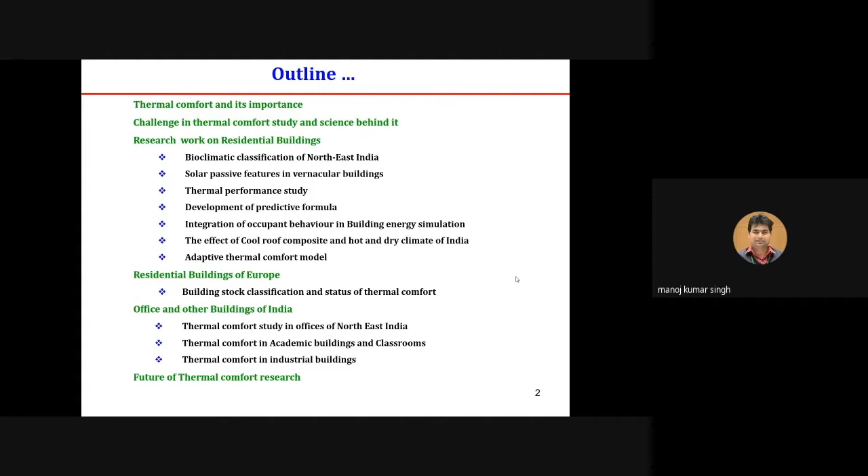So let's start with thermal comfort. Why is it important? Because we spend about 95% of our lifetime in the built environment and just 5% outside. The more we spend time inside the built environment - it may be houses, offices, inside buses or cars, or recreational centers like shopping malls, cinema halls - all different kinds of built environment together constitute about 95% of our lifetime. So it's quite huge. If we spend so much time in such environments, it becomes very important that we must feel thermally comfortable.

And whatever thermal comfort we achieve there, it may be substantial, and we must be accepting towards it. And the cost of achieving thermal comfort is very high, because generally in today's perspective, we use air conditioners.

Simply we use air conditioners, and we know, as students of energy, what is the energy cost of running an air conditioner. It's also very important because it affects our well-being, our health, our learning ability, our productivity, and above all, it is related to CO2 emissions, as we know. It is also indirectly related to global warming.

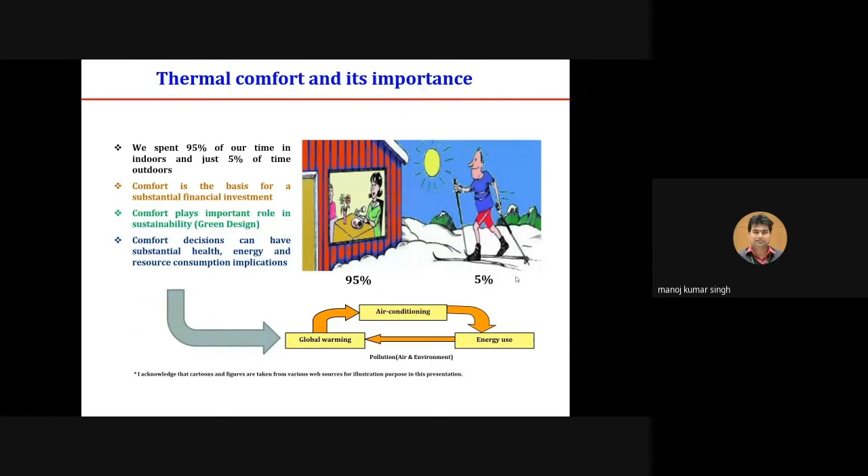So what are the challenges? The challenge associated with thermal comfort lies in the definition itself. There is a definition by ASHRAE that thermal comfort is the condition of mind that expresses satisfaction with the thermal environment. So it's just a state of mind.

It defines it, and on the other hand it also says that people or occupants staying in the built environment are just passive to this thermal comfort - they don't react, whatever we provide, they accept it. But this was not an accurate definition.

Then there was a modification done to this definition in the start of the 90s, and pioneering work was done by Professor Richard de Dear, Professor Nicol, Gail Brager, and many other scientists. They did path-breaking work where they said that actually people are active in the thermal environment, and when they feel discomfort, they react in a way which tends to restore their comfort. This is a more agreeable definition, as we experience also - whenever we feel discomfort in the built environment, we always act, and we act in a way that restores our comfort.

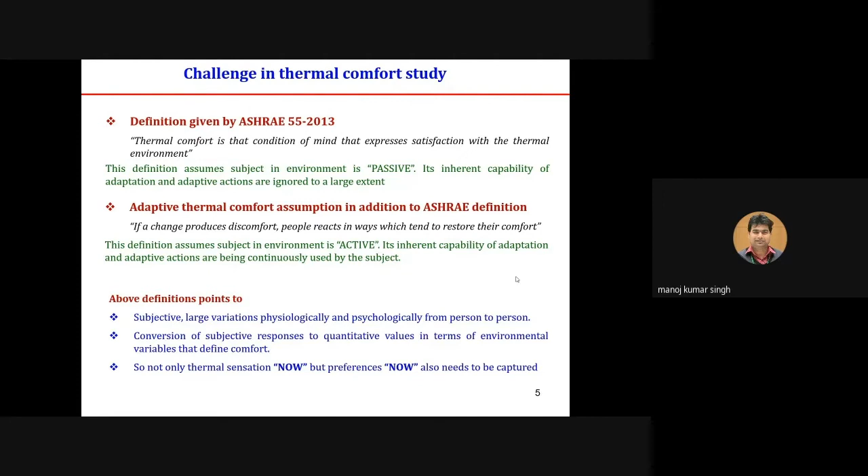In thermal comfort research, there are 4 environmental parameters and 2 personal parameters. The 4 environmental parameters are air temperature, relative humidity, and air speed. This air speed is not the actual air speed, but the speed across our exposed skin. And then radiant conditions, where we consider mean radiant temperature for the calculation. These are environmental factors because as design engineers, we have to control these things.

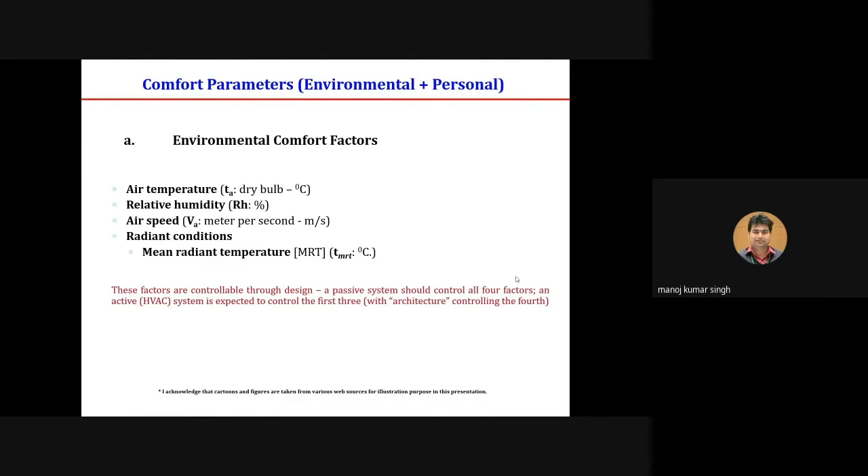The personal factors are clothing and activity level. These are actually person dependent. Each person, based on their choice, wears clothing, and based on his need, does different activities that relate directly to metabolic rate. And metabolic rate is directly related to heat produced from the body. So these personal factors vary from person to person.

Also the mental state of the subject matters. If the person is very anxious or very excited, then definitely his metabolic rate will be higher, and that also affects his response to the thermal environment. So that we also have to take care of.

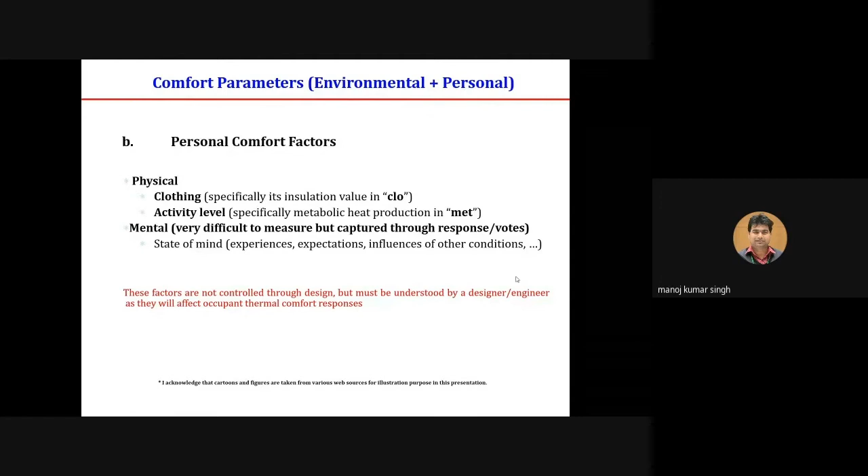As a design engineer for built environment, a person working as a consultant or as an expert of this subject should have a very good understanding of this. This is a designer's and engineer's job: he has to understand the physical basis of thermal comfort and related variables, appreciate the influence of psychological aspects of thermal comfort, and use this understanding and appreciation to design spaces that building users will decide are thermally comfortable.

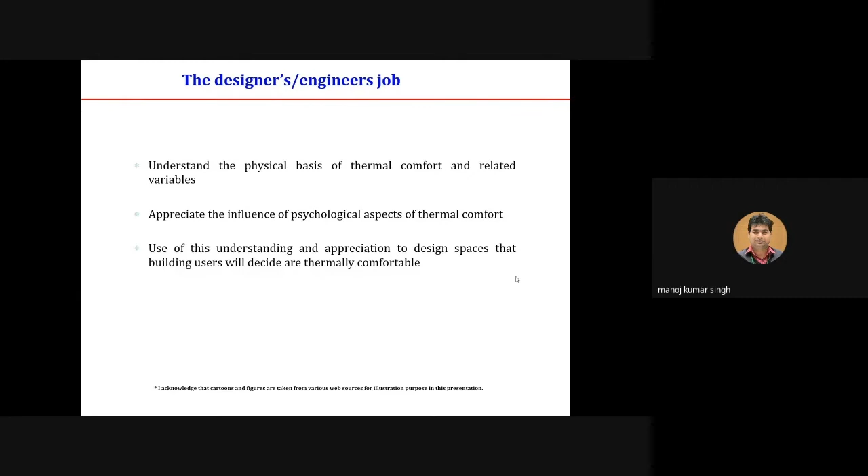These are some of the instruments that we use. These are portable instruments that we can carry. Since this is a subject where we need to interact with occupants who may be in different types of built environments, if the instruments are very bulky, it's very difficult to carry. So generally we use portable and very sensitive instruments. We carry them and interact with the occupants, and while interacting, we record physical parameters like temperature, globe temperature, air velocity, humidity, and surface temperatures, and so on.

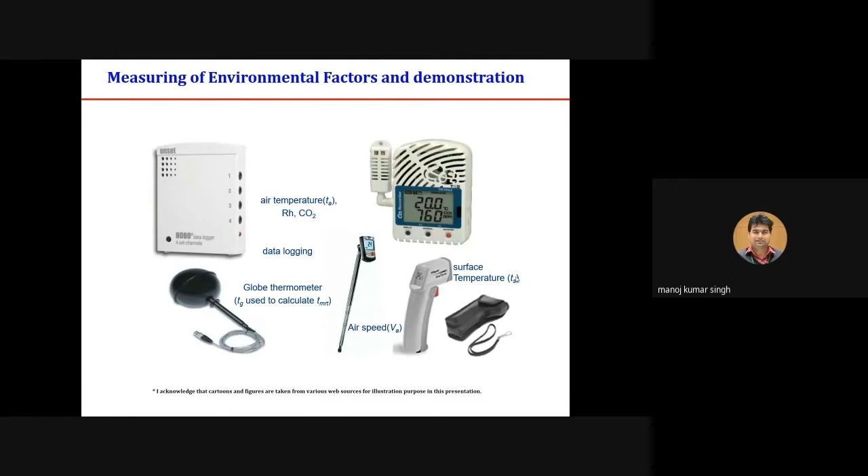When we put all these instruments on one stand, we also call it a weather station. Generally we keep this close to the occupants with whom we are interacting and collecting data.

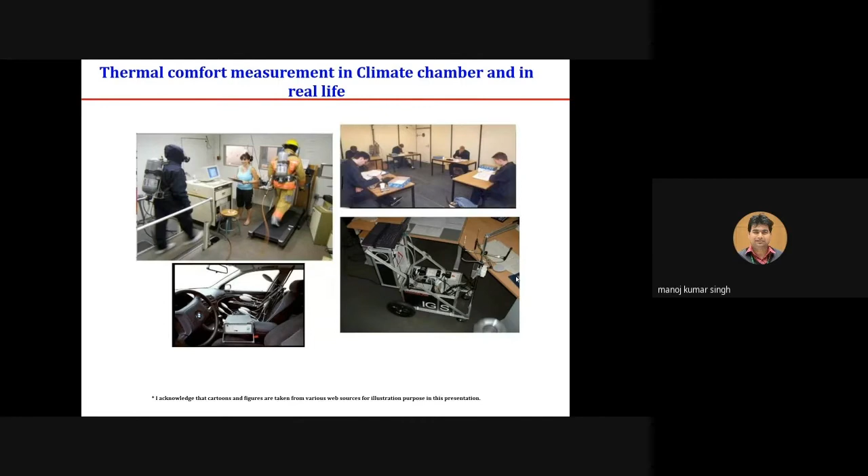These are different kinds of experimental setups where we record the responses of occupants. The top left figure is of a climate chamber, where the external environment is controlled, and people are engaged in different types of activity while we record their responses. Next is a classroom setup, where experiments are also done. We also do some experiments in cars. And in the bottom right hand side, you see all the instruments on a trolley, which we carry to the occupants with whom we are interacting.

There is also a preference scale on a similar 7-point thermal preference scale. So we record those votes also, and then we analyze them.

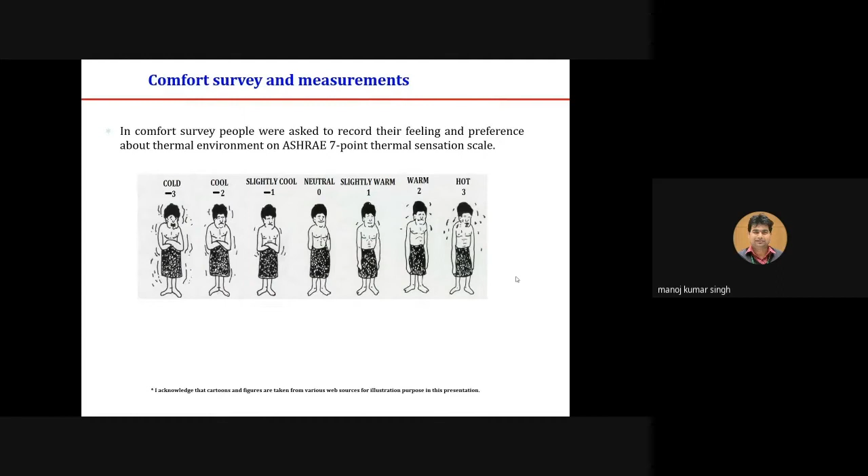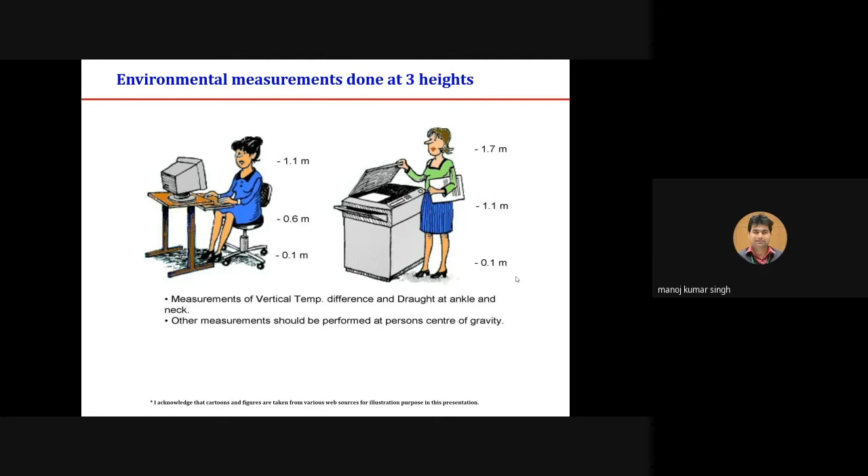It depends upon where you are doing the experiment. If you are doing the experiment in European countries, generally the height of people is more, so the range is about 1.7 meter. If we are doing it in Asian countries, the height of people is generally less, so it's about 1.5 to 1.6 meters.

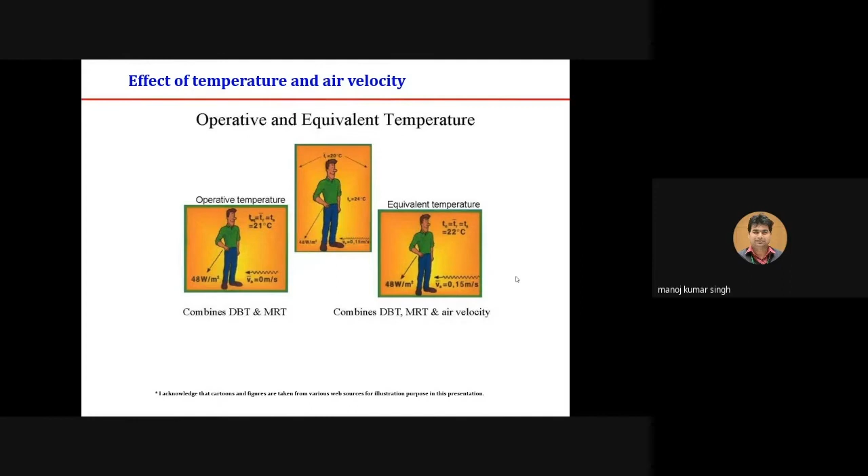So these are the effects of temperature. Operative temperature combines dry bulb temperature and mean radiant temperature. But if we consider the equivalent temperature, it also, in addition to dry bulb temperature and mean radiant temperature, considers air velocity. So air velocity has a profound effect on thermal sensation. If there is no wind, at the same dry bulb temperature and mean radiant temperature, a person may feel comfortable, but as the wind starts, he may feel cold.

So this is generally the difference between operative and equivalent temperature, and these are the actually derived thermal indices. So we combine two or three parameters to get this, so they are called derived temperature units.

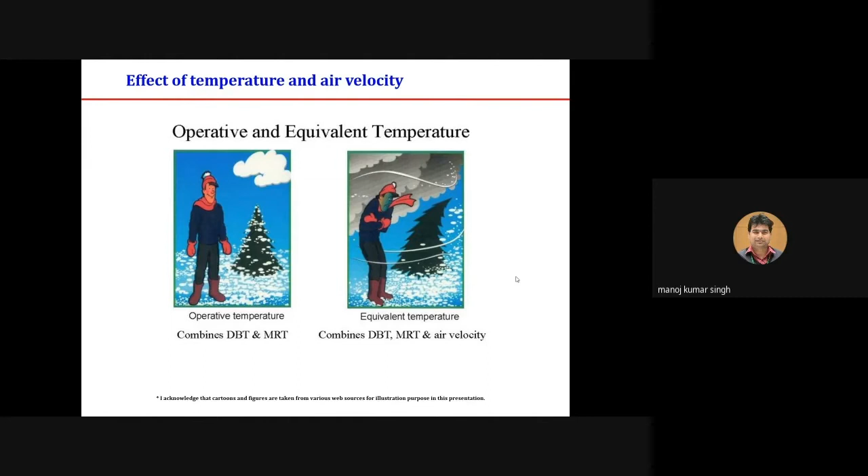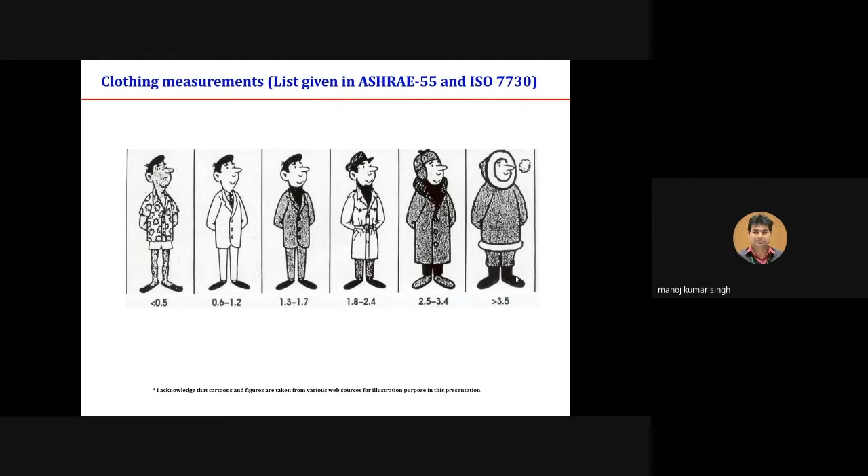So the science behind this comfort is generally the balance between heat produced and heat lost. If the amount of heat produced is equal to the heat lost, then we say it's neutral. The body is not gaining or storing heat. What is produced is what is lost, so the body remains constant, and that is where we feel comfortable. Whenever there is some kind of storage taking place, or there is more loss compared to what you are producing, or the loss is more rapid, then we feel cold.

This is the equation that we deal with in thermal comfort, the heat balance equation. S is the rate of heat storage of the human body, M stands for metabolic rate, W stands for the mechanical work done, that is met, E is the rate of total evaporation loss, and R plus C is dry heat exchange through radiation and convection. I'm not going into detail, but this is the general concept.

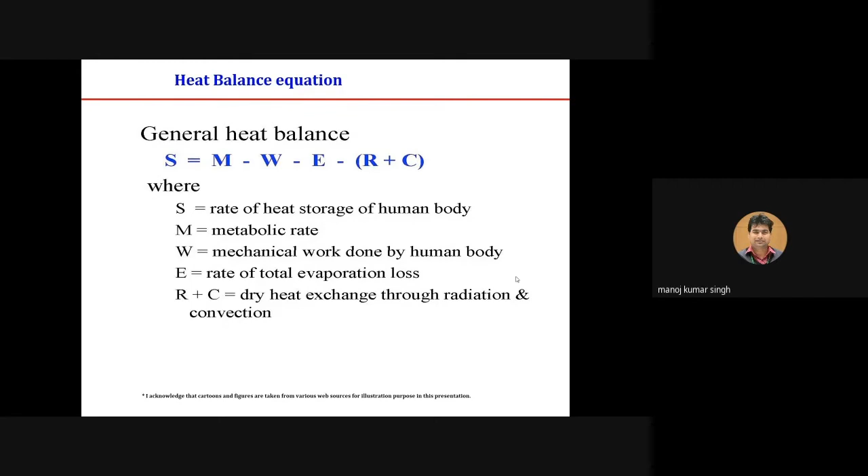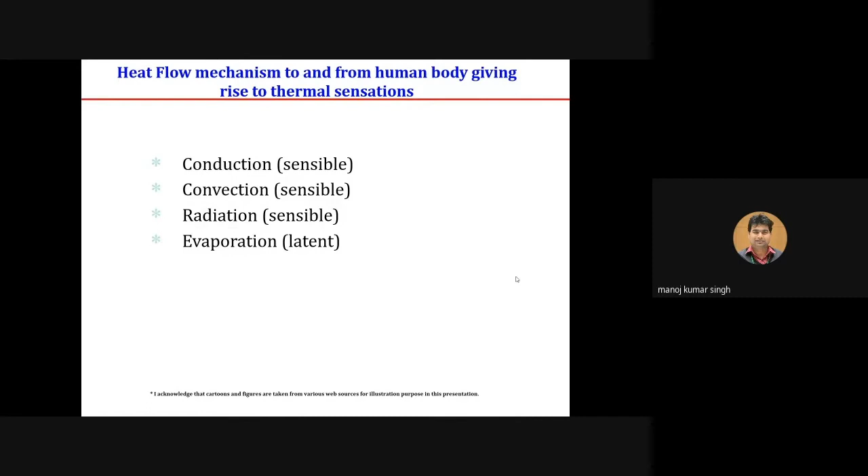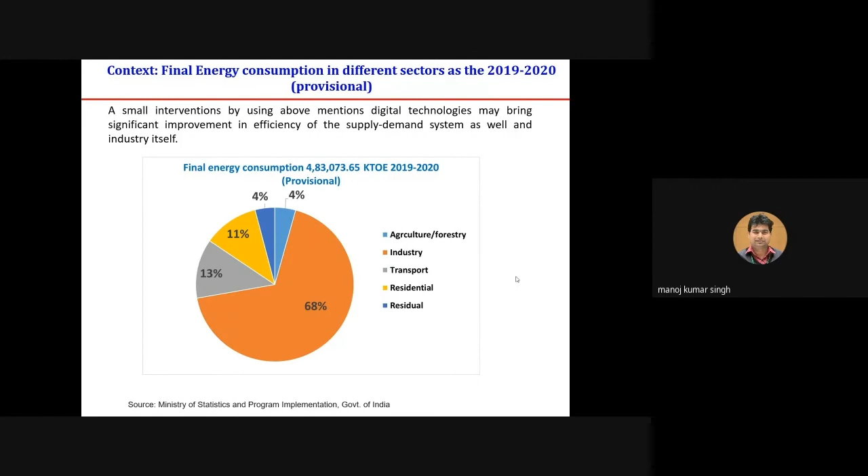So what is the context actually? Why do we do this research? Because it is indirectly related to energy. You see this Indian basket of final energy consumption, 2019-20, these figures are provisional. Industry consumes around 68% of total energy, and residential consumes about 11%. If you see the next slide, it's much more worrying, because in the residential sector, 60% of this energy consumption goes to air conditioning. This tells us that we have to think about it and construct our houses more responsibly so we can minimize energy consumption and enhance comfort.

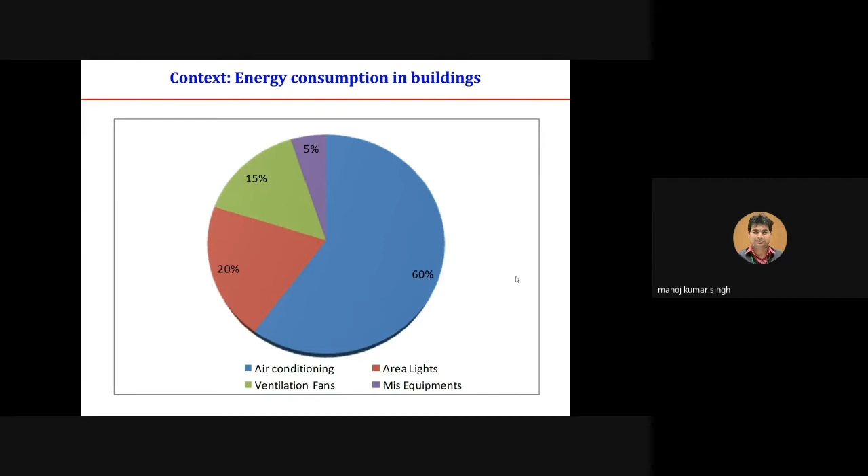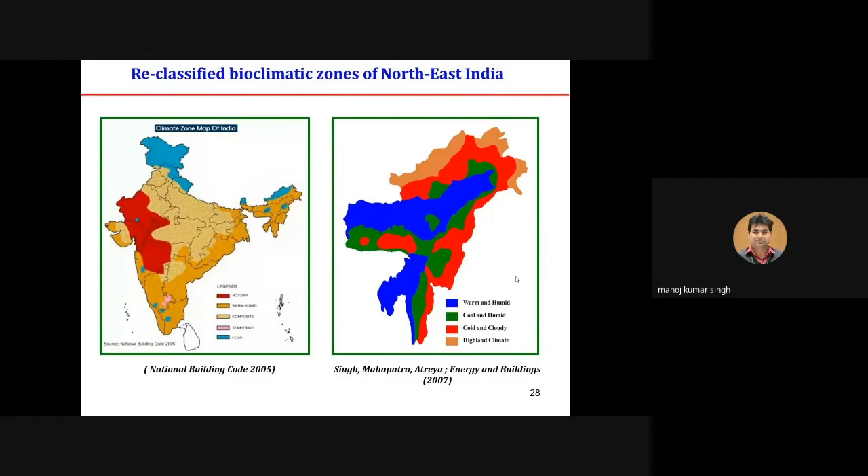So we collected data from stations throughout Northeast India, information about temperature profile, humidity profile, precipitation profile, and altitude, and then analyzed this data. These are about 30 years of average data, and finally we classified Northeast India into mainly three bioclimatic zones: warm and humid, cool and humid, and cold and cloudy. The right hand side figure represents the new bioclimatic zoning, with specific ranges for summer and winter temperatures, humidity, rainfall, sky condition, wind direction, and vegetation. This provides more detailed information that can be used by architects in designing buildings, and also by researchers working in this area.

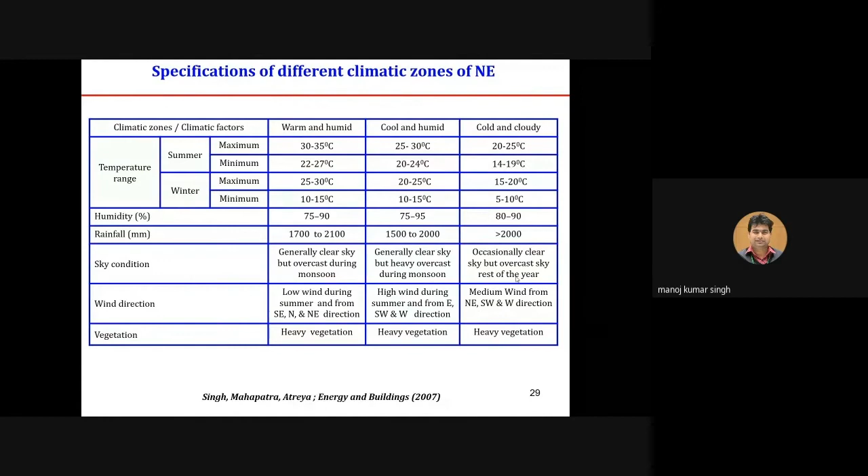We also have to estimate the bioclimatic potential. That means the climatic features that we can use in the building to enhance comfort and lower the energy consumption needed to attain comfort.

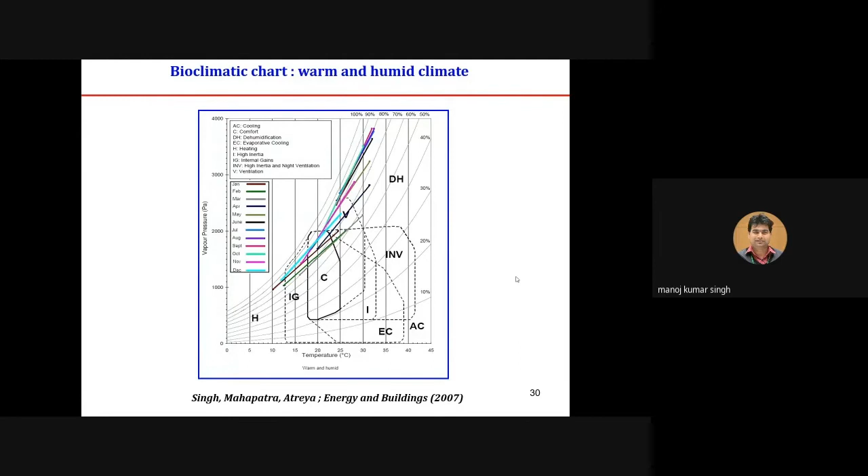We also see the comfort duration, where we don't need either cooling or heating, so naturally we are comfortable. The temperature lies between the comfortable range. Same applies for heating.

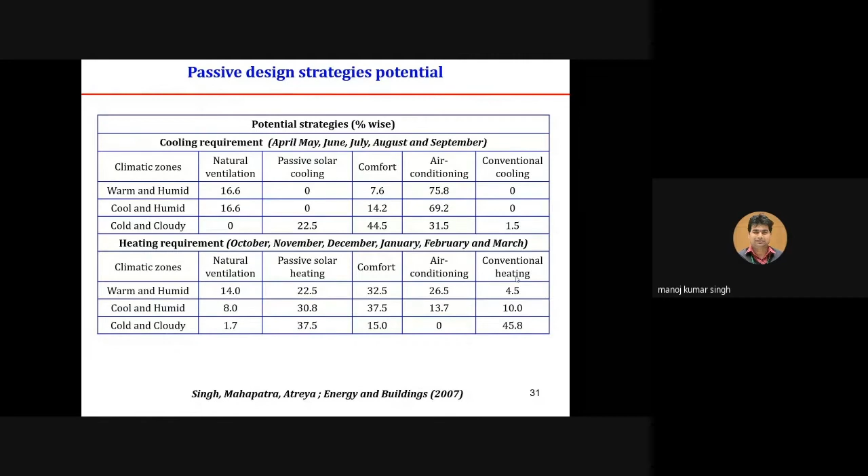We also studied the existing features in traditional architecture, and found a lot of bioclimatic features related to ventilation. These enhance natural air circulation inside the building, as there are many openings provided, and these openings are aligned according to the wind direction.

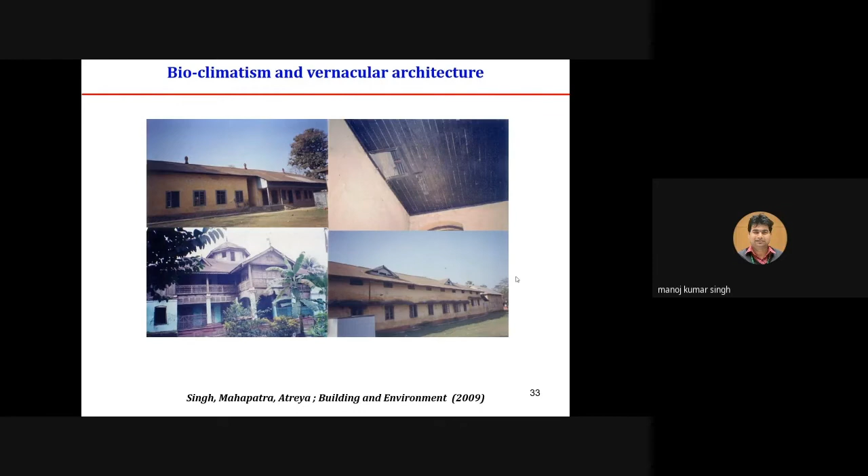Also, to minimize heat gain, the structures are made of wooden structures on the top floor, with a lot of wood used. These are some of the solar passive features about ventilation techniques we documented.

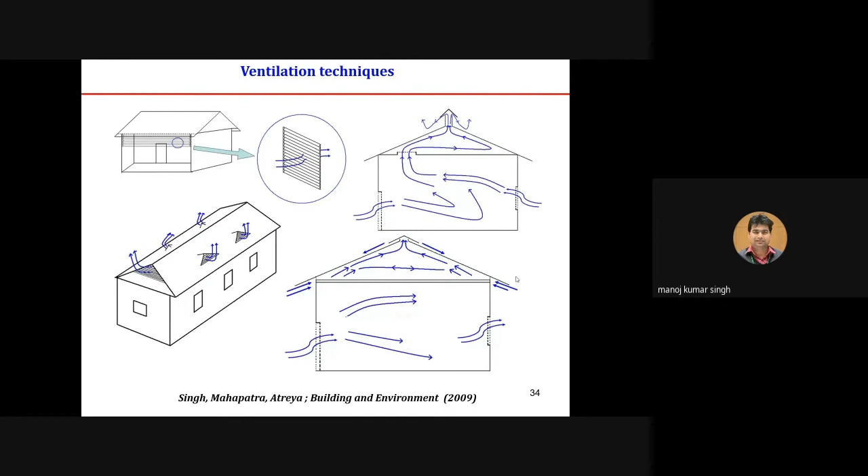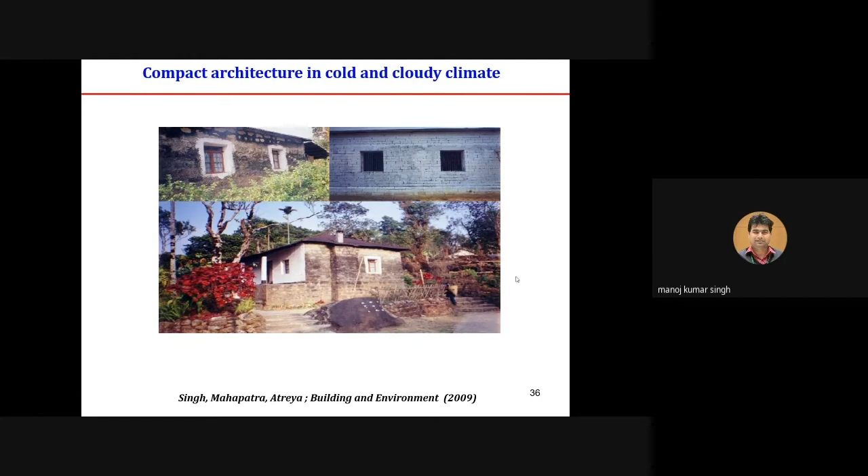Next is thermal comfort and thermal performance study. We carried out a survey in around 150 houses, 50 houses in each climatic zone, and interacted with about two occupants in each house. This study was done throughout the year, and then we evaluated the data.

We also selected 3 houses in each climatic zone and monitored them for almost 1 month in each season—4 seasons in a year, starting with winter, spring, summer, and autumn—and carried out the thermal performance study.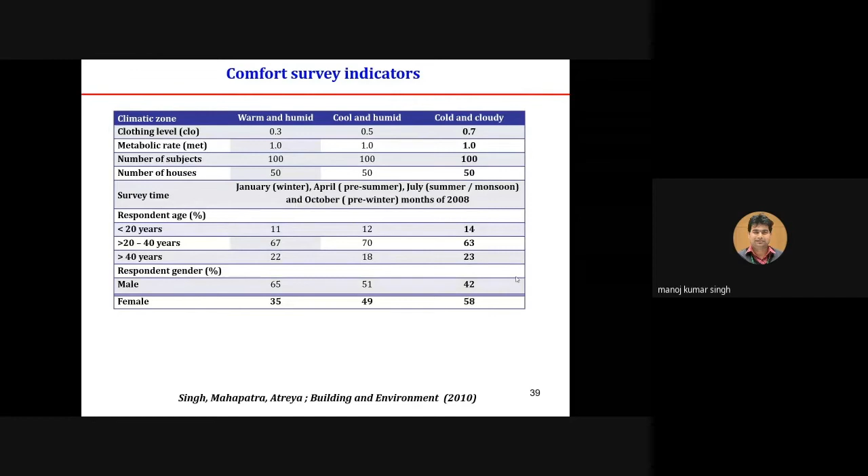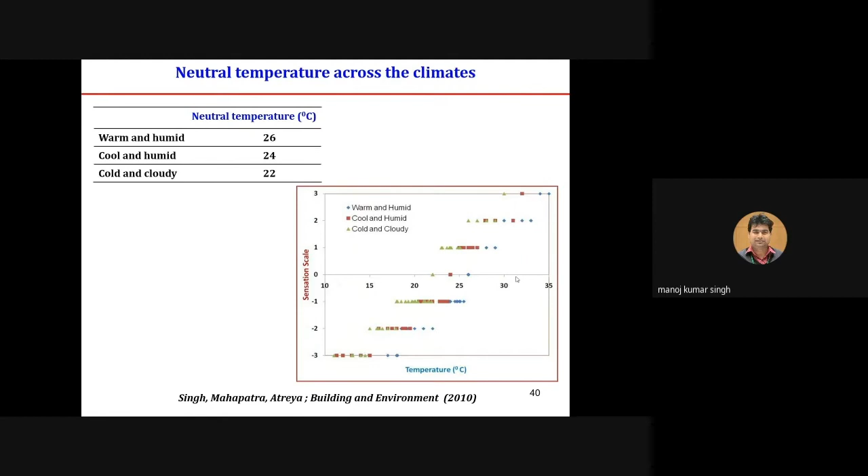This is about the comfort range we found after analyzing the data, for warm and humid climate, that is Tezpur. Tezpur is the study location, lying in warm and humid climate. We found that the comfort range starts from 22.8 and goes up to 29.1.

So this is about almost close to 7 degrees Celsius. Now with this range, if we provide this information to the architect or building designer, he can design the building in response to the climate.

The same applies for Imphal and Cherapunji, and in all the places we got the comfort range throughout the year—close to around 7 to 8 degrees Celsius. It was quite interesting information, and when we communicated it, it got published in Building and Environment. From there onwards, people started talking about the range of comfort temperature.

It's always not possible to monitor or visit all the houses in a particular region, because there is a time constraint, resource constraint, and also accessibility issue. So it's always beneficial if we do some kind of mathematical modeling.

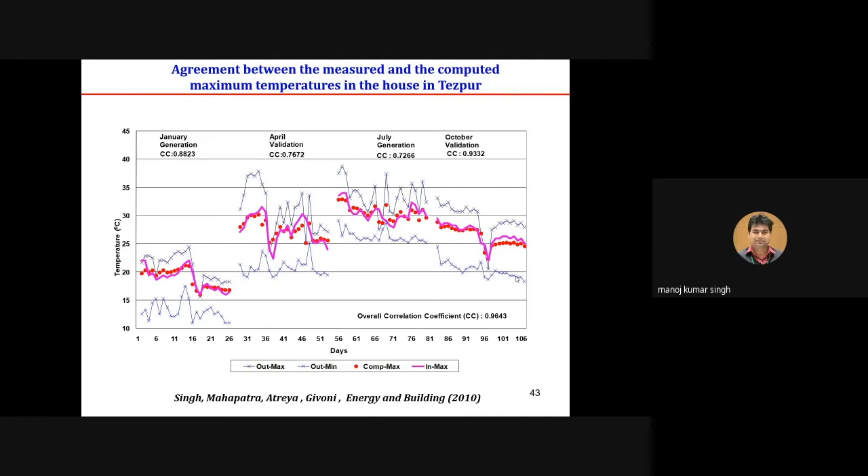Again, it's not possible for us to do experiments in different conditions. We cannot sometimes create some conditions during the experiments. So it's always better to do the simulations.

The most efficient simulation tool in this area of research is TRNSYS. There are other tools also, like Design Builder, Energy Plus, Virtual Environment. There are a lot of tools, but TRNSYS has got some special capability because it's a very modular program. So whatever you want to do, you can do. There is as such no boundary, and it's very versatile.

So this tool is used very widely in building energy simulation. So we also studied, and we tried to integrate the occupant behavior.

Occupant behavior has a profound effect on energy consumption in the building, because if the person is uncomfortable, he will take all the actions, and these actions are all focused on restoring the comfort. Also, each occupant has different behavior.

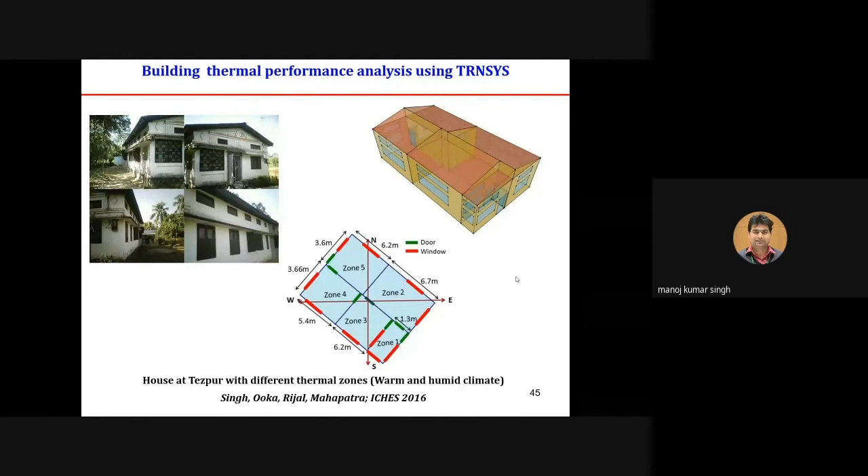So this is the house where we modeled in TRNSYS, and we tried to integrate the occupant behavior there. This occupant behavior is related to the opening and closing of windows. So we have control strategy 1 and control strategy 2. Control strategy 1 is the strategy that we got after analyzing the thermal comfort data, and control strategy 2...

We devised control strategy 2 just to check how effective the control strategies are. So we created our own strategy 2, and we compared the results.

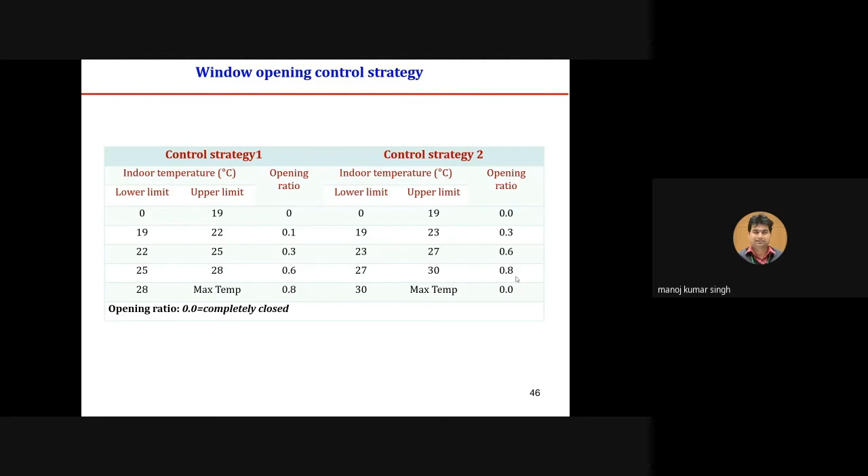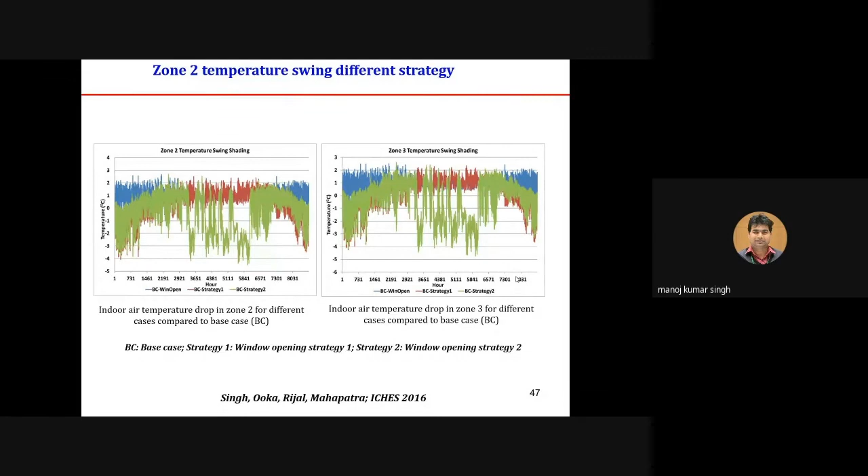But because of control strategy 2, it deteriorates in summer, and same in winter also. So from here we concluded that the occupants of the houses are operating the windows quite wisely. So when we design automation of window opening and closing, we must do some kind of surveys in the houses so that we can devise the exact control strategy.

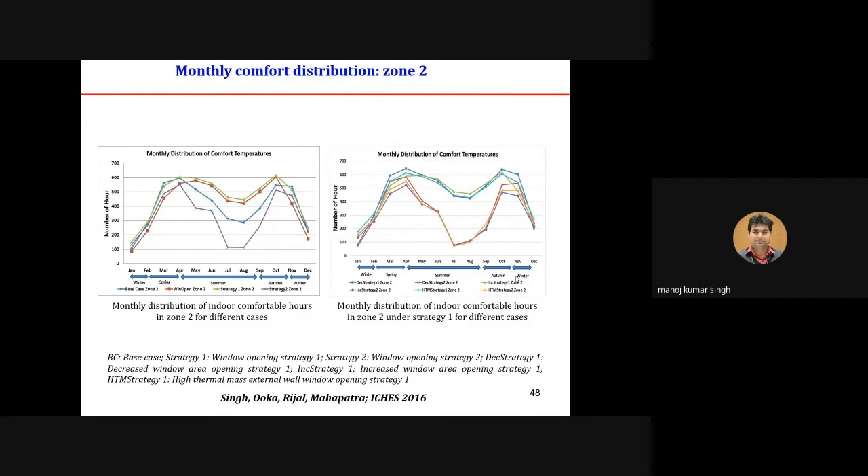And also we know the effect of cool roof. Cool roof is a passive technique where we do reflective coating on the exposed part of the roof, and then we analyze the effect of it on the indoor temperature. These days you should be hearing a lot about reflective coatings, cool roof techniques.

These are nothing but reflective coating - a white paint, generally white in color. It has a high reflection coefficient, and it reflects most of the solar radiation. So it blocks the heat that transfers to the indoors. We analyzed that also.

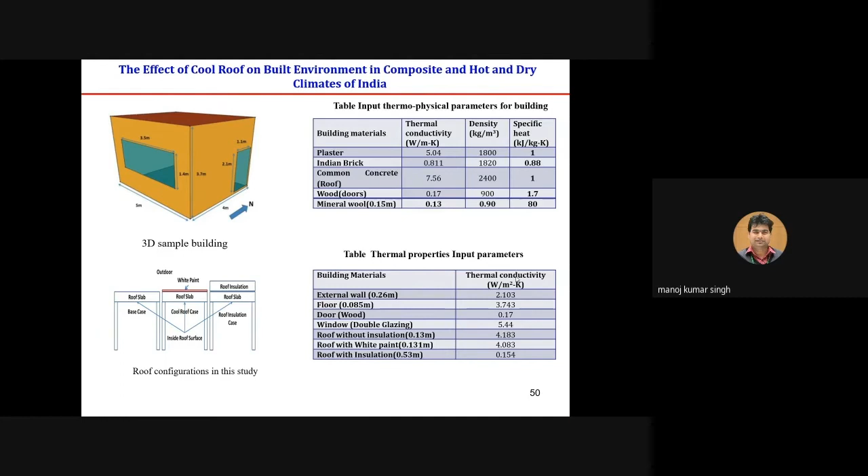For that, we considered a simple house, put all these parameters, and ran the simulation. The figure on the bottom left shows the construction, how we constructed it - we put the roof slab, and above that we apply the white paint, and then we run the simulation.

So here we find that when we apply the cool roof concept, there is a temperature decrease of around 4 to 5 degrees Celsius in summer months. And if we convert this in terms of heat energy and cooling load, it is huge. So 4 to 5 degree lowering of temperature inside the building is very significant. With this, we found that cool roof is quite effective.

So when you have seen this, the definition is about adaptive thermal comfort. There are always two approaches: one is the heat balance approach, and one is adaptive thermal comfort. As both definitions are different, generally people carry out experiments using the heat balance approach, and when it is applied to the field, there is a deviation.

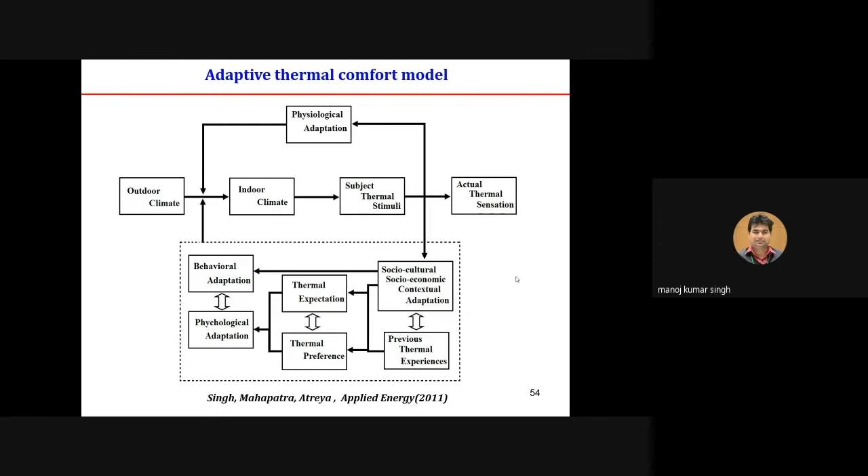So since that study should not get wasted, if we can add some kind of corrective term - in physics or engineering, when we do detailed experiments and find some kind of error or deviation, we calculate some kind of coefficient and add it to the actual formulation so that it defines the deviation we get in the experiment result. So the same approach is applied here, and we calculated the adaptive coefficient.

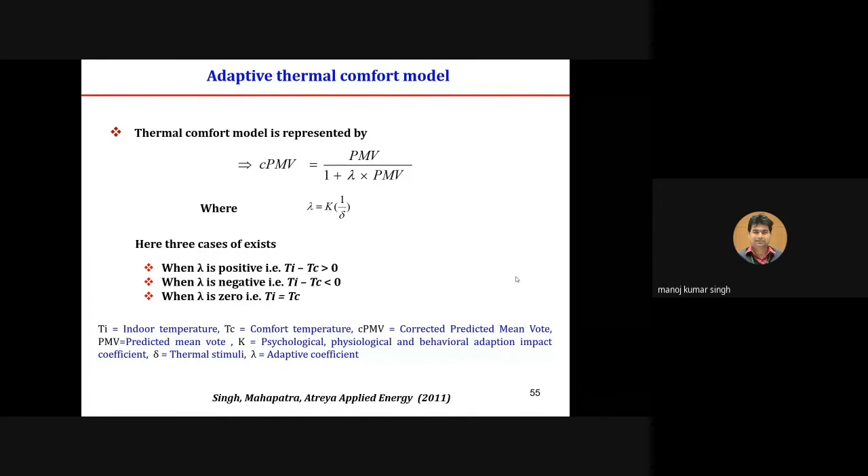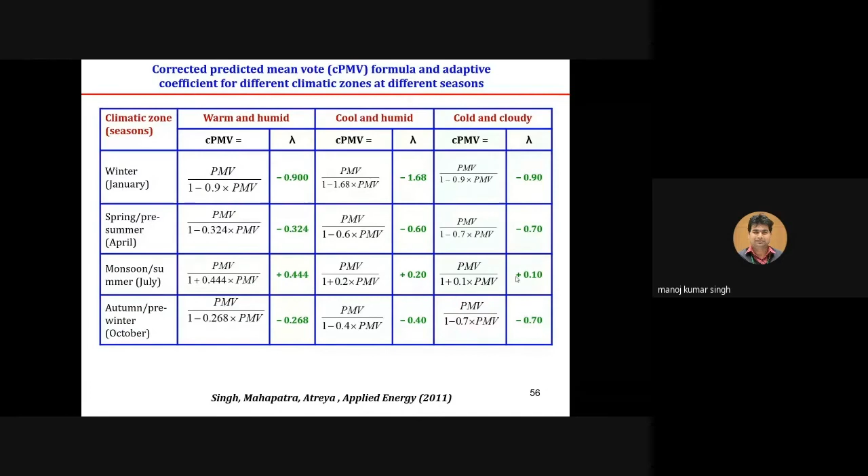So this is the formula of that. Lambda is the adaptive coefficient, and we calculated this coefficient. When these coefficients are added to the actual formulation of thermal comfort, the results become close to the field results. So this graph shows the same thing.

So we see on the left hand side, top figure, there is a deviation between AMV and PMV. PMV is the heat balance approach, and AMV is the adaptive approach. So when we applied the adaptive coefficient to this PMV, the results become very close to the actual experimental results. Same is for summer conditions.

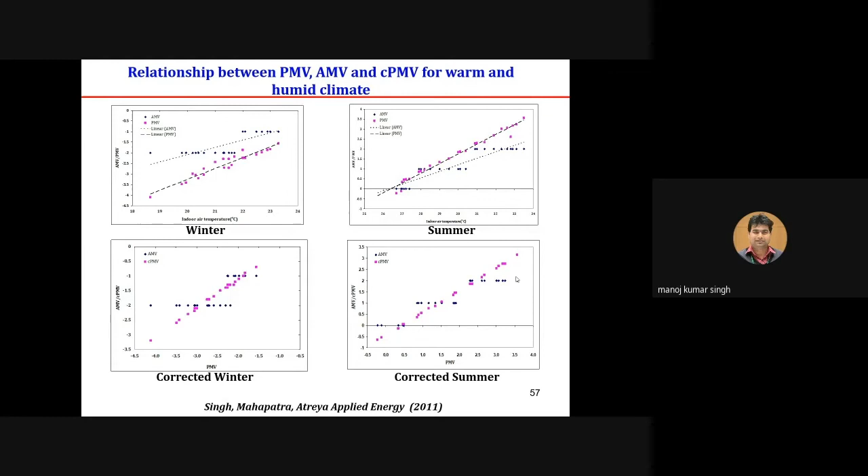So, as sir told, I also went to a European country, Belgium, where I was assigned to work on traditional residential buildings. These residential buildings are almost 70 years old, constructed after the First World War. I had to work on them and define what is the comfort status, and why people are not going for retrofitting, because the heating energy consumption was one of the highest in those buildings - even compared to European standards, they are almost double, 2 times that. And Liège city has almost 60% to 70% of the building stock that lies in that category.

Since these houses were constructed during that time, there are no modern equipment for heating, and nothing like insulation. So these houses are already designed very compact. Now if people go for refurbishment, meaning retrofitting, they lose a lot of indoor space, because insulation materials are anyway around 6 to 8 inches thick, and they have other losses, like furniture and everything. When they retrofit, it doesn't fit in the building, and these costs were not covered by government or bank. So there's a failure, and then I was assigned to do this work, and I completed it.

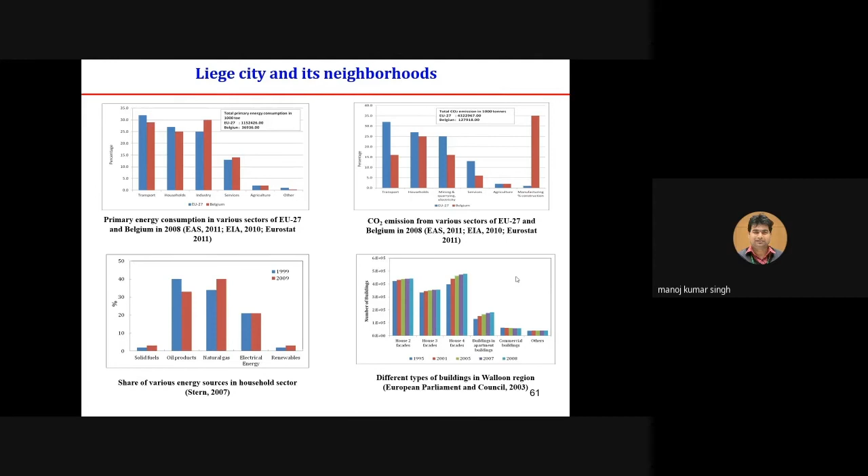So this is again the figure, and here is the age group of houses. These are the classification of the houses, and age group in different, about the different built-up area. And then composition of external walls of the houses that are constructed before 1945. And this is the distribution of buildings with shared facade, more than 35%.

So you see that at the center, where the space constraint is there, there are more number of houses. They have 2 facades exposed to the outside environment, that means there are more apartment buildings. This is about density of apartment buildings.

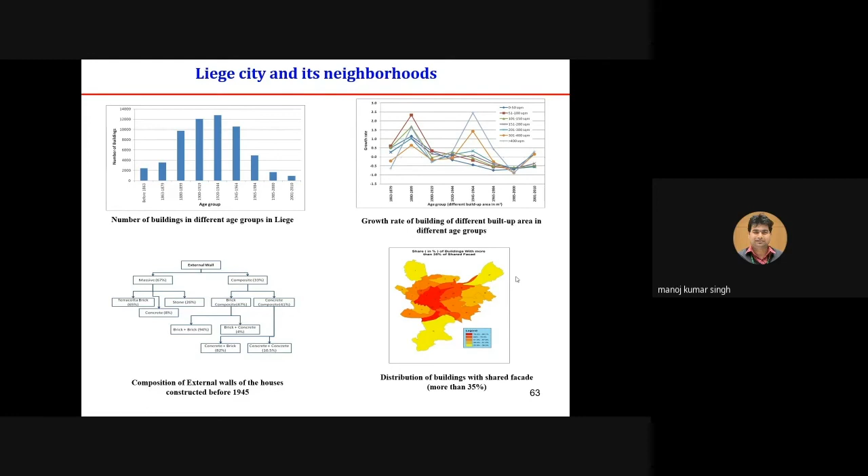And there also I monitor 2 houses, one in winter and one in spring, and see, this is the characteristics of the houses. So in winter, see, this temperature is quite fluctuating because in this house a thermostat is not installed, since it was a very old house. Its construction was close to 1918 or something.

So they control the heating manually, and they have a gas heating system. So they don't have radiators. They burn gas, and through that gas burning, they heat the indoor temperature.

So this house, this automatic thermostat was not installed, so they are controlling the heating equipment manually. You see there's a large fluctuation, and also in winter months they have an overheating problem, where temperature is going close to 30°C. This is one of the biggest problems in all European homes where some kind of retrofit is done, so even in winter months they have an overheating problem.

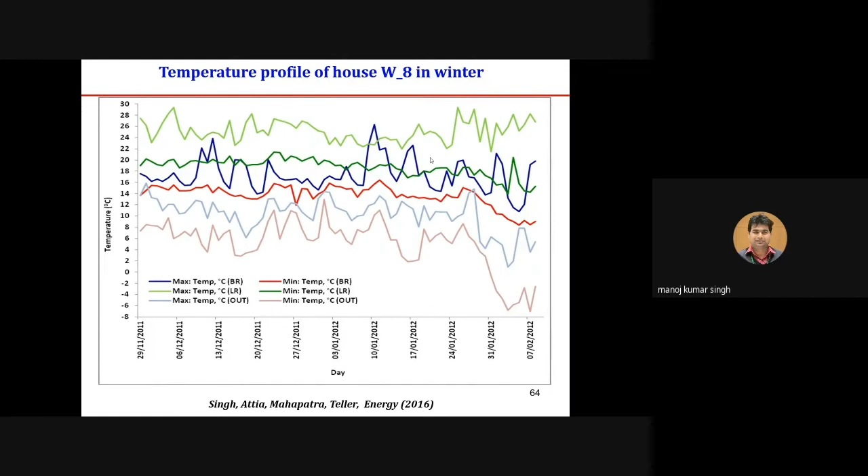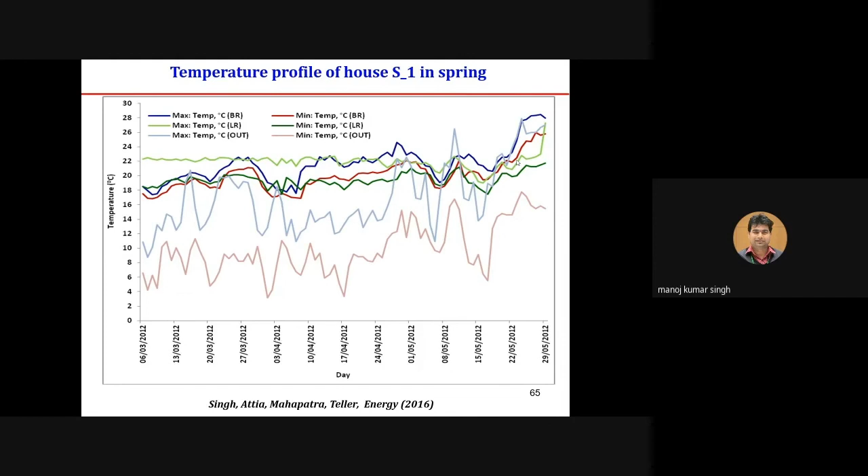This overheating problem in European houses is very high these days, because the government has enforced this retrofitting, so they have to go for insulation, and the houses are such that the top floor is the bedroom. In Europe, the sunlight starts at around 8 o'clock in the morning, and in the evening it goes up to 8:30 p.m. So almost the entire day this room is exposed to the sun, and then there is overheating. So these kinds of issues are cropping up, and they are working on cooling technology where the houses can be kept at comfortable temperature. This seems very strange, but yeah, this is the acute problem these days in all the European houses.

So this is the detail about the comfort duration in these houses. The pattern is quite distinct. So you see this, the temperature range and duration of various houses.

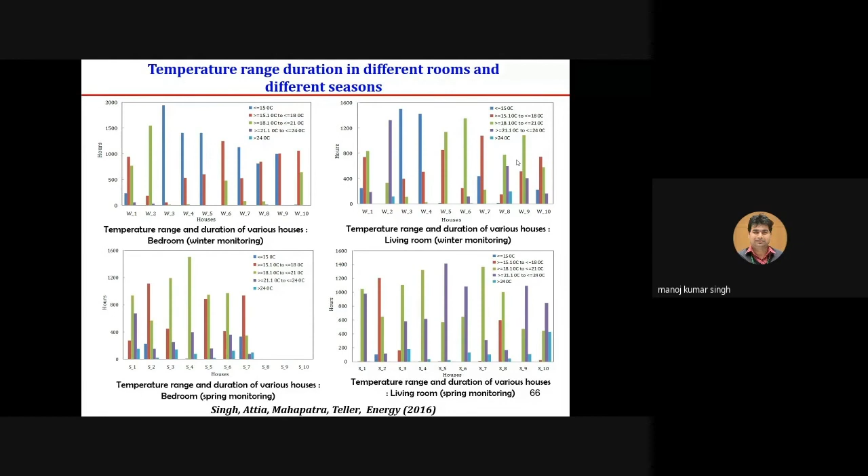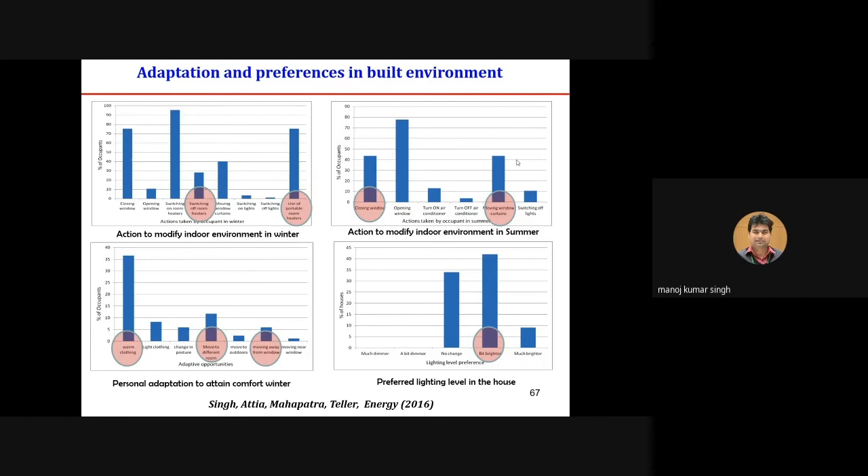So now, since I'm still working on this area of thermal comfort, I studied different types of built environment. Some cases I will discuss here, and here you will see some graphs, some plots that we commonly do in thermal comfort study. So this is about the offices.

I did this study on thermal comfort status in the offices of Northeast India. My study locations were Tezpur, Shillong, and Imphal. In the first leg of my studies, I considered Tezpur and Shillong, and I will show the analysis of this.

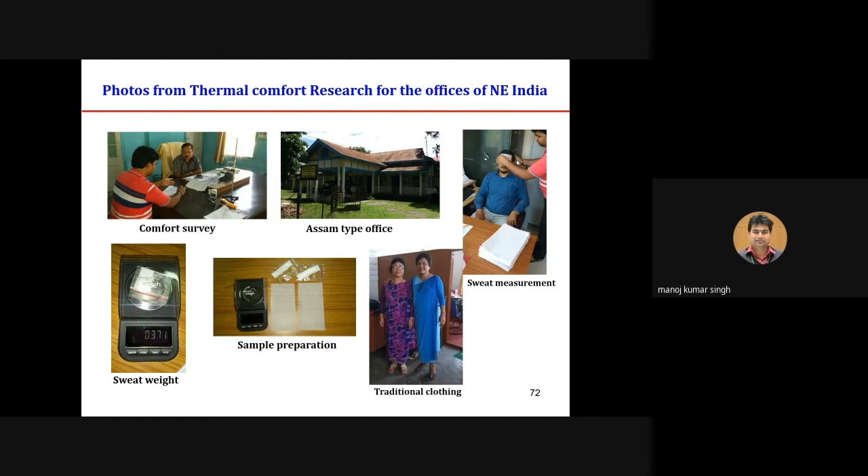This is the way we do surveys. We also record the data. We interact with the occupants one by one, take the environmental measurements, and then analyze it.

Though the neutral temperature is close to 24 degrees Celsius, people prefer to be higher than that - close to 26, 27 degrees Celsius - because that is their comfort temperature. So people tend to stay warmer.

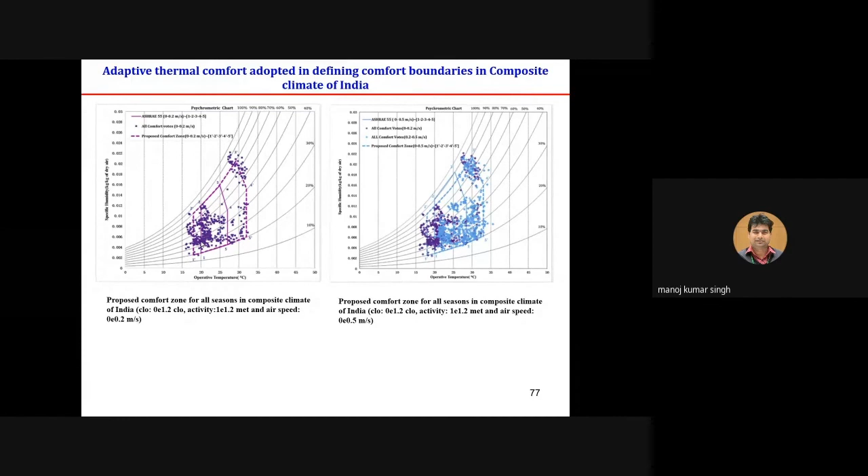So here we did this - this is the bioclimatic comfort chart for the composite climate of India. These boundaries you see on the right hand figure are defined based on the data we collected.

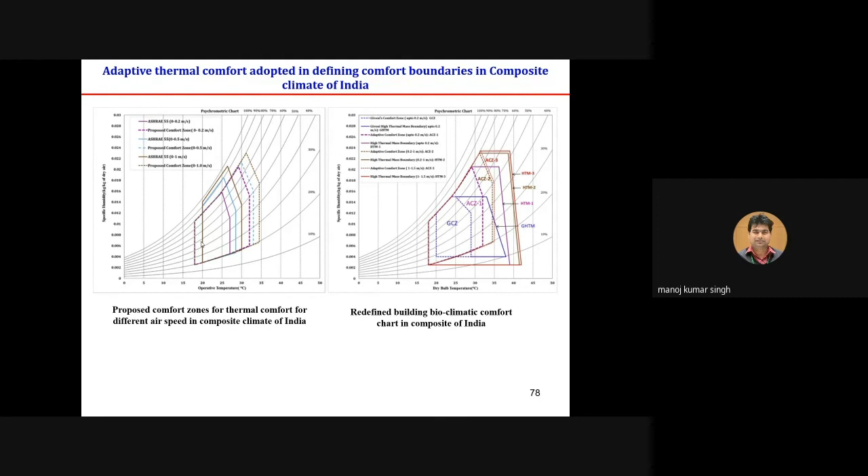This kind of chart is very important for architects and building designers, so we can use the solar passive features or bioclimatic features and integrate them into the building design.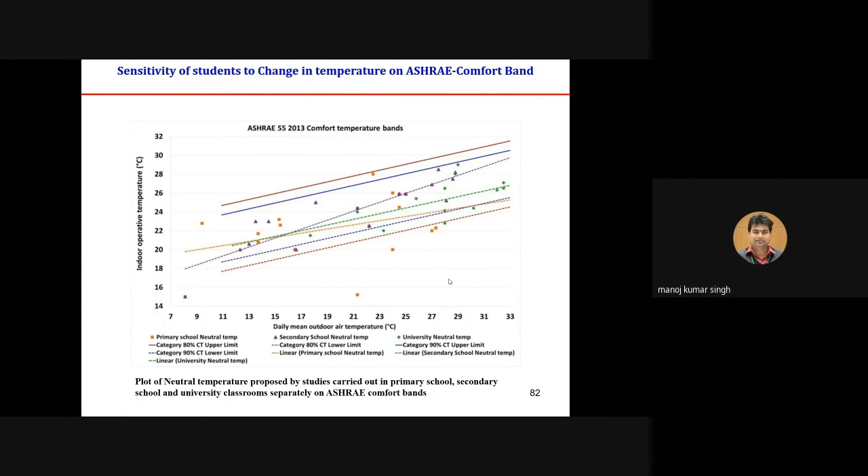This is about the higher and lower limit of comfort temperature. Asia has the higher range of comfort temperature because in Asia most schools and classrooms are still naturally ventilated.

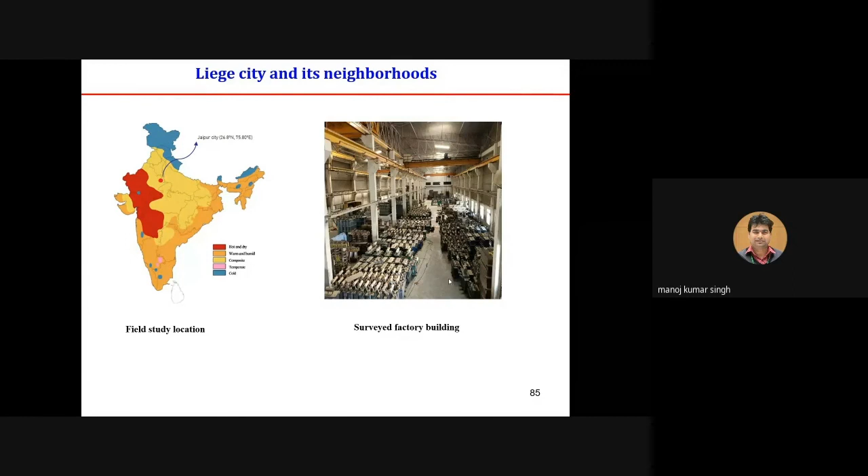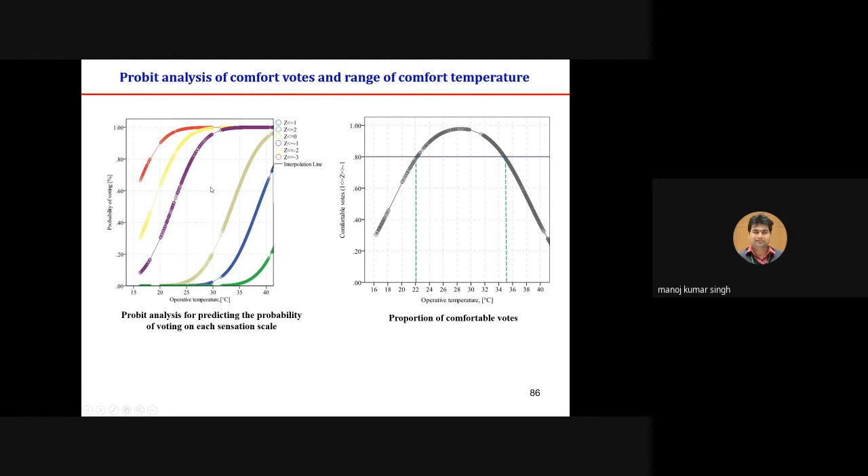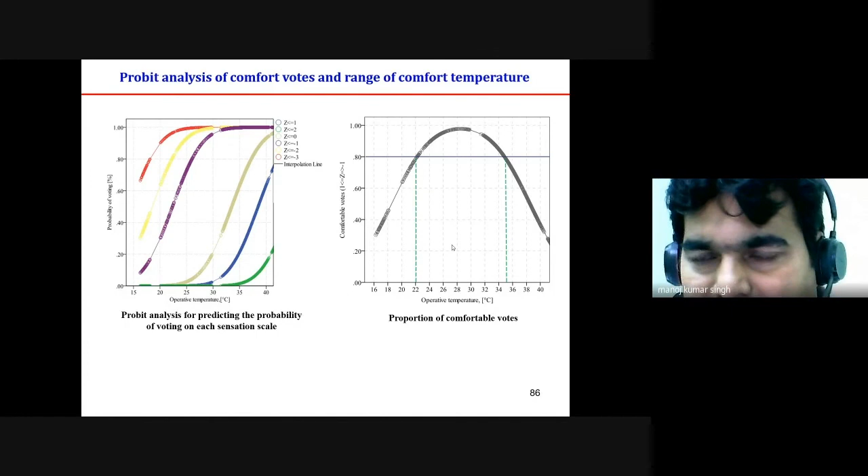The right hand side figure represents the same information in a different way. The two green lines and the temperature range between them show the range of comfort temperatures in the industrial setting.

This is a different type of analysis where we define the comfort range on the left, and on the right is the logistic regression analysis for predicting fan use behavior in the industrial setting. In the industrial setting, fans start operating well below 20 degrees Celsius, close to about 18, and when it reaches about 30 degrees Celsius, almost 80% of the fans are operating.

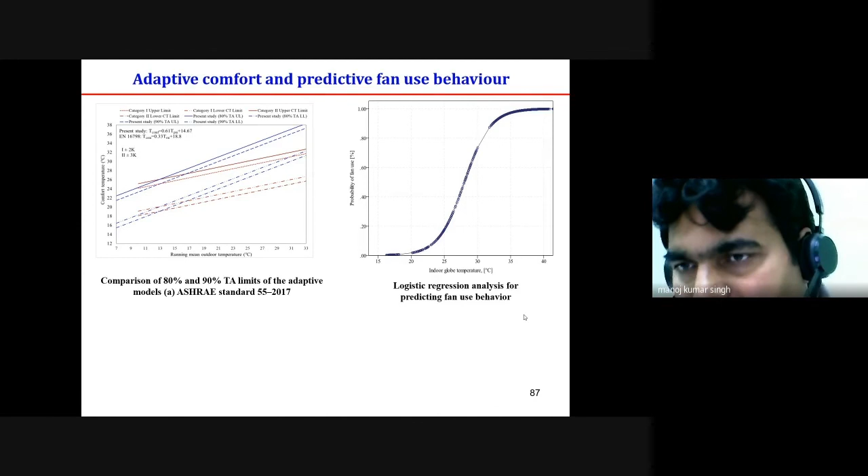And when it is about 35 degrees Celsius, almost 100% of fans are operating. Since this is an industrial setting where activity level is very high, people have to do very hard work, so their metabolic activity is high. This right hand figure tells about the probability of fan use versus temperature.

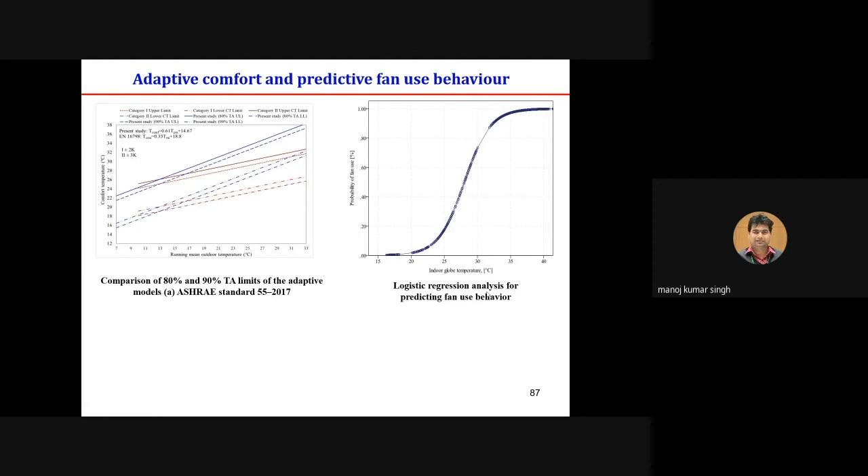We see that in industrial settings, fan use starts at close to 18 degrees Celsius, and goes up to around 80% fan use at about 30 degrees Celsius, reaching about 100% at around 35 degrees Celsius. Since activity level is very high in industrial settings, there is a lot of heat production, and people prefer higher air velocity because the cooling effect is greater due to evaporative heat loss.

Now about the future of thermal comfort research. Thermal comfort research is moving towards personalized thermal comfort in offices and other built environments to increase productivity. This research is also moving towards linking occupant behavior in building simulations, because it impacts energy consumption, as well as the impact of climate change and changing weather patterns on present and future thermal comfort requirements and human well-being.

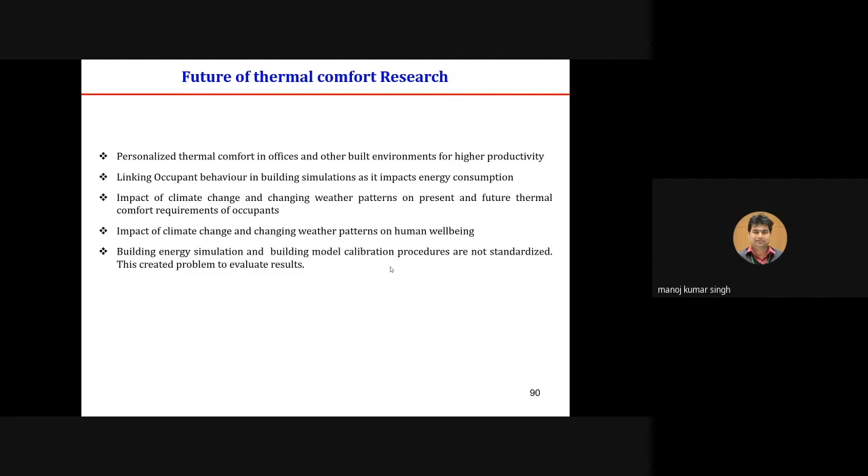Building energy simulation and building model calibration procedures are not standardized, so a lot of research is going on to standardize this process because it will help in evaluating the results. This is about collaboration.